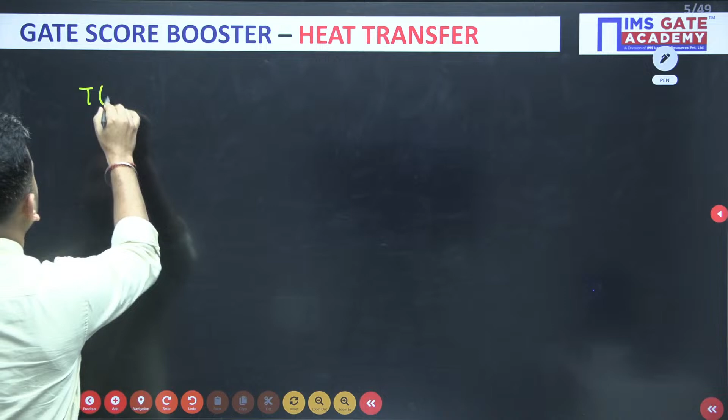The relation is given as TR equals G dot R naught square by K, times 1 minus R by R naught square, plus TS. Before going to the options, let us first find what requires some mathematical calculation.

Let me find the heat flux. Heat flux is given by minus K dt by dr. In the radial direction, the temperature is changing, so I am using dt by dr, and you can see it is varying with respect to r. So I will first find dt by dr and then substitute r equal to r naught.

So dt by dr, simply differentiate with respect to r. Ts is constant, so it will be 0. So r naught square by K, 1 differentiation is 0, minus 2r by r naught square, again Ts will be 0. Minus and minus is plus, so that is gone. Minus and minus is plus, and what are the terms which I can cancel? K and K get cancelled, R naught square gets cancelled, plus and plus is there.

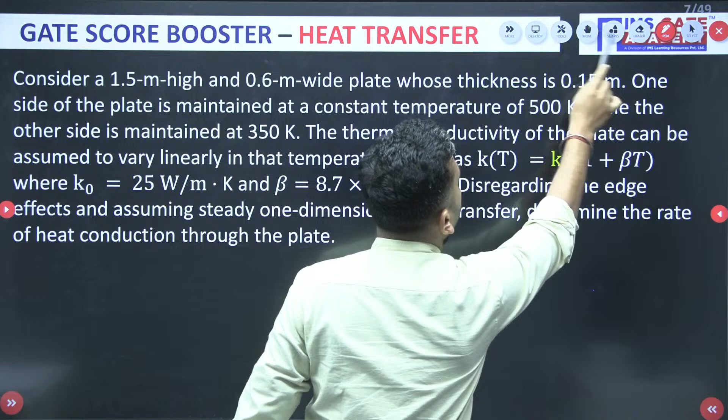Without wasting any time, let us proceed to the next question, and this is the next question that is there. Please read.

So this is an NAT question. You can give your answer close to 1 decimal place. The question is saying: consider a 1.5 meter high and 0.6 meter wide plate whose thickness is 0.15 meter. One side of the plate is maintained at a constant temperature of 500 Kelvin while the other side is maintained at 350 Kelvin. The thermal conductivity of the plate can be assumed to vary linearly in that temperature range as given: Kt equals K0 times 1 plus beta T, where K0 and beta values are given. Now disregarding edge effects and assuming steady state heat transfer, determine the rate of heat conduction through the plate. Yes, that is an NAT question.

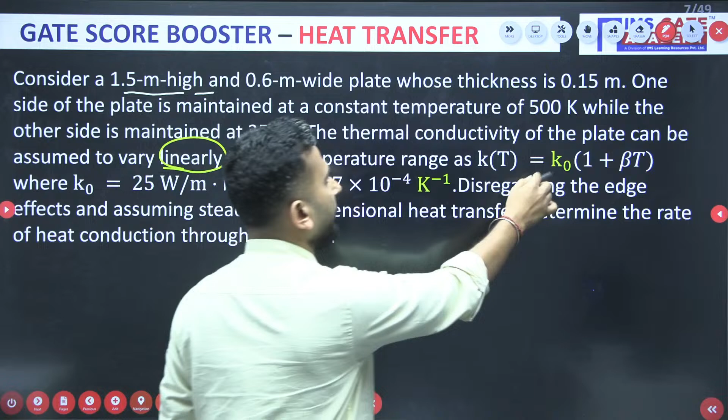The thermal conductivity of the plate can be assumed to vary linearly in the temperature range, given as K naught times 1 plus beta T, where K naught and beta values are given. Disregarding the edge effects, what is the rate of heat conduction through the plate?

So my dear friends, see, your K is varying. Your K is varying over here, with respect to temperature.

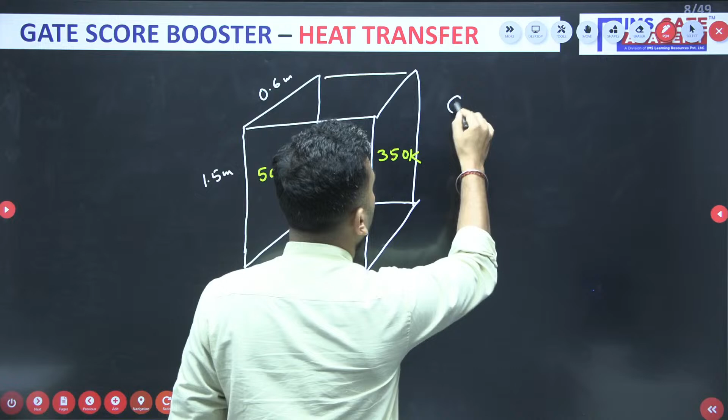So what to do? If you have read this concept of varying thermal conductivity, which formula do you use? That K average times A times del T by L, del T by thickness. The same formula for a slab I will use, but instead of K, which was constant in the formula, I'll be using K average. And what is K average? Your K average is the K value at an average temperature.

So K is given as K naught times 1 plus beta T. So what will be K average? K average will be K value at average temperature. That means K naught times 1 plus beta times T average. What is T average? T average will be 500 plus 350 divided by 2.

So K naught value is given as 25. Should I write it over here? K average is, okay, let me take it to the next page. K average is, K naught is 25, K naught times 1 plus beta. What is beta value? Beta value is given as 8.7 into 10 to the power minus 4.

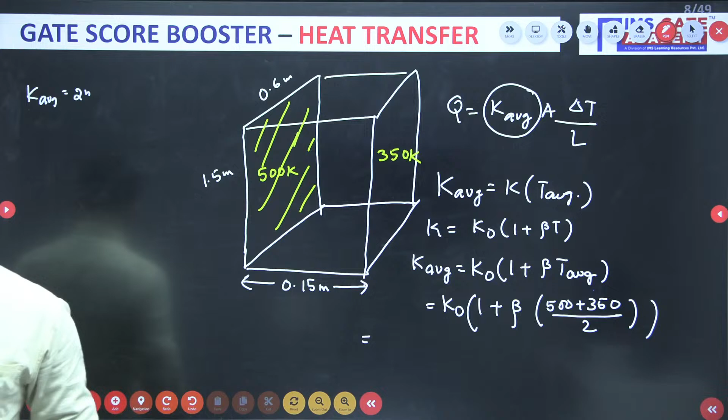You can proceed by integration also. If you don't want to proceed by the K average concept, you can proceed by integration, you will get the same answer. Anyway, moving ahead, I hope no doubt is there. Let us check the next question. I suggest everyone try the questions; if you are not getting the answer, immediately leave that question and proceed to the next. Now it's time to read another question.

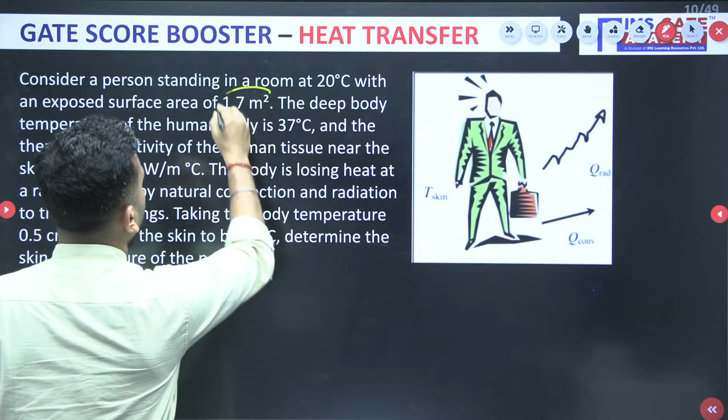So what is the question saying? Consider a person standing in a room at 20 degrees centigrade with an exposed surface area of 1.7 meter square. The deep body temperature of the human body is 37 degrees centigrade, and the thermal conductivity of the human tissue near the skin is given. The body is losing heat at the rate of 150 watts by natural convection and radiation to the surroundings, taking the body temperature 0.5 centimeter beneath the skin to be this value. Determine the skin temperature of that person.

Anyone with the answers?

Anyone? Okay, so I think it's time I should discuss.

From what he's saying, the body is losing heat at the rate of 150 watt by natural convection. Let's say, taking the body temperature 0.5 centimeter beneath the skin, this is the skin layer. 0.5 centimeter below the skin layer, the temperature is 37 degrees centigrade. That means I can assume it's a kind of hot, and from there the body loses heat.

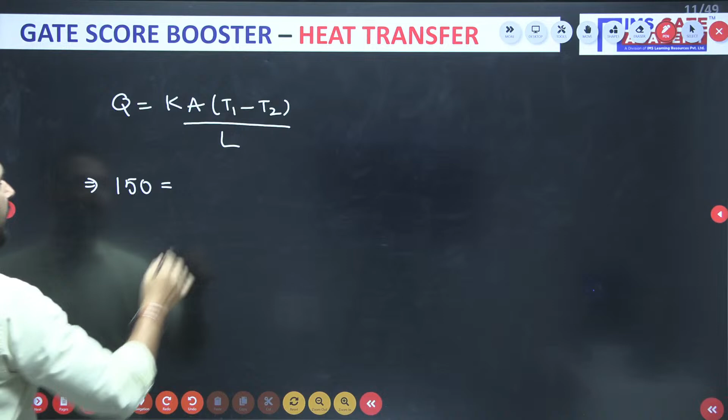I have to simply apply this formula and get one of the temperatures. So Q is equal to K A (T1 minus T2) divided by L. If you put over here, I know all the things: 150 is equal to K. K value is 0.3. And what is A? Area is given as 1.7.

1.7. And what is T1? T1 is 37. Minus, what is T2? T2 is T skin, divided by L. What is L? L is nothing but the thickness, so 0.5 centimeter, that means I can write 0.005 meter. And if you put all the things, the TS value will come out to be

35.5 degrees centigrade. So which makes A the correct answer. I got no answers for this, why?

Is it visible? Is the audio and all visibility clear? Is the audibility and visibility clear? Okay, so should I proceed? Should I proceed? Okay, because I cannot see your comments over here, so just a minute. Okay, no issues. So now the next question comes. This is the next question. Please.

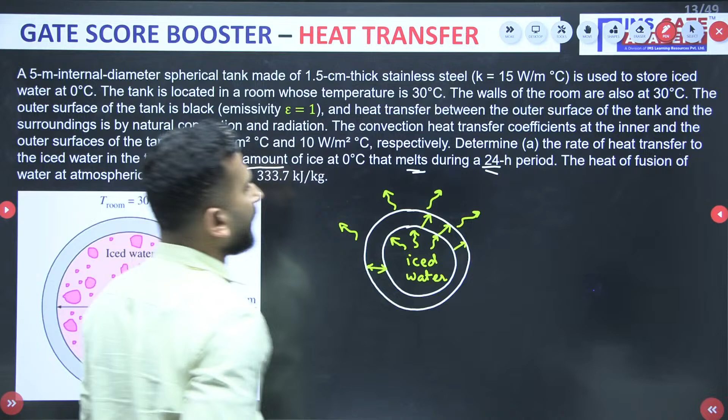When iced water is there, ice is kept. So when ice loses heat, it will definitely melt. That is the second part of the question, how much ice is melting during a 24-hour period. So first we have to calculate the rate of heat transfer, and second, how much ice is melting, because when heat is transferred, ice will melt.

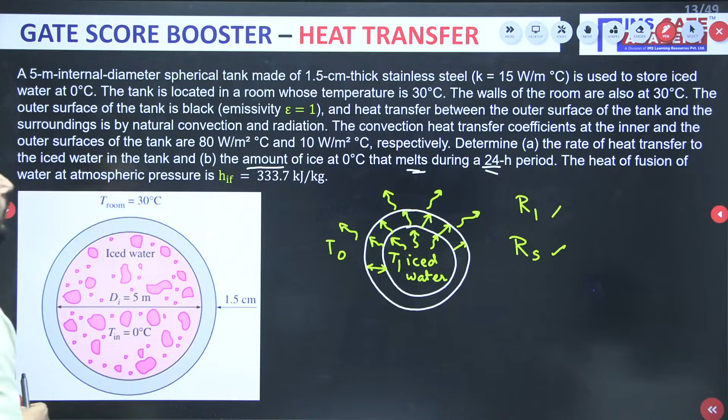So two parts there. First I will find the internal thermal resistance, R1 or Ri. Then I will find the resistance due to this spherical tank, let's say Rs, which is R2 minus R1 by 4 pi k R1 R2. Finally I will find the outer surface resistance. I know both temperatures, the inner and the outer. So basically I know all the things, I just have to calculate it using the given data.

So all the things I know.

Cannot see the comments, why? It's like that only, but I cannot see the comments. Chat is disconnected, Wi-Fi problem sir. So it cannot be refreshed. It's not connecting, for 10-15 minutes it is there. Reconnect. Yes, anyone with the answer? Anyone with the answer? You kept the mic on sir while speaking with me. It's okay, no problem, it's coming sir actually. I cannot see you, fine, okay.

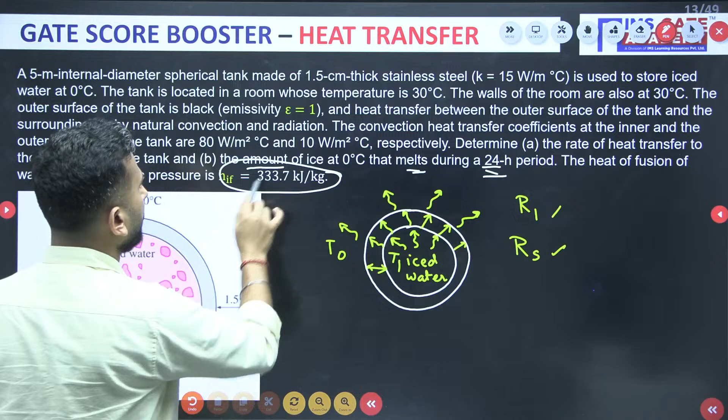Now the first part of the question is done, and the second part is how much ice melts. What is the amount of ice that melts during a 24-hour period? The heat of fusion is given, meaning for 1 kg, 333.7 kilojoules of heat is required.

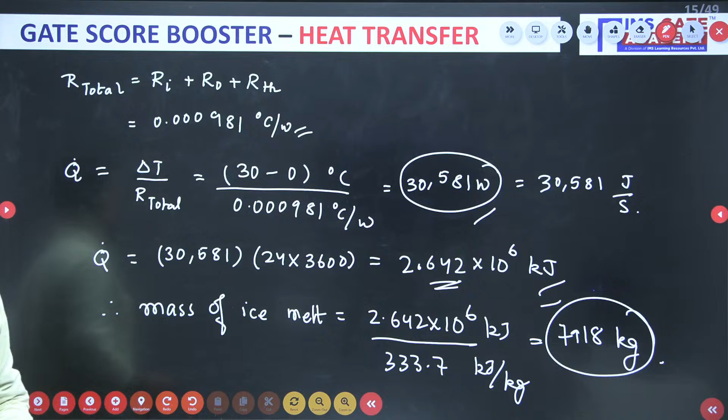No issues. So yes, Loki Christine, you are saying that I made a calculation error. Are you sure that you have not committed an error yourself? Are you sure that you have not committed a calculation error? Tell me, are you 100% sure?

So if that is correct, now let us move towards the next question. Okay, please read the question. Okay, let's move ahead.

This is the next question, my dear friends, and this is a question on fins. I am giving you 2 to 3 minutes to think about the question. Please try this question.

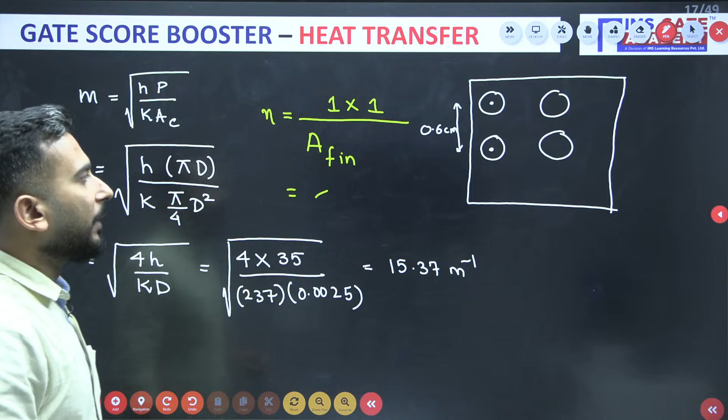But tell me one thing, is your fin occupying the entire flat plate? No, there is some distance between the fins. So you cannot apply this formula directly.

So what you have to find: let's say this is a section of 4 fins that I am taking, in a square of 0.6 by 0.6 centimeter. So in a square section of 0.6 into 0.6, how many effective fins are there? If you see this figure and have understood it, you will get to know that in a section of 0.6 by 0.6, there is a total of 1 fin that is lying.

So your total square section is 1 into 1, 0.6 centimeter by 0.6 centimeter square area, you have 1 fin. So now total how many fins will be there? Total number of fins will be 1 meter square by 0.006 into 0.006. That will give you the total number of fins. And if you solve this, you will be getting 27,777 fins. Is this clear? If this is clear, we can move to solve the next question.

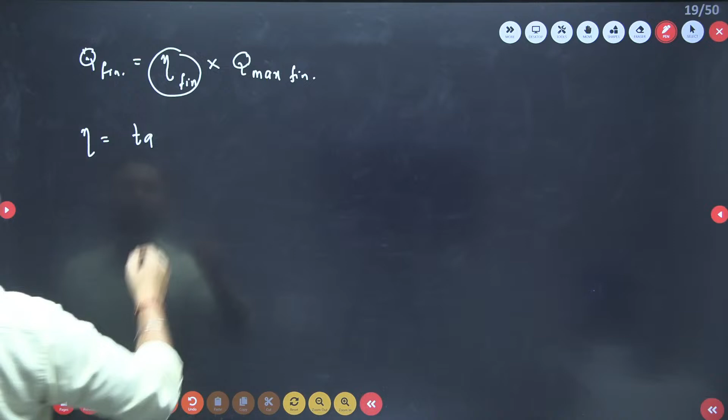What is m? As we calculated in the beginning, it was 15.37, and the length is 0.03 meter. So tan hyperbolic of 15.37 into 0.03, divided by 15.37 into 0.03. If you calculate this, the efficiency will come out to be 0.935. This is the efficiency.

Now what is the Q max? What is the concept of Q max? That when the entire fin is at the base temperature, then calculate what is the amount of heat transfer. So that is nothing but h into A, with the entire fin at base temperature, minus T infinity.

Okay, so should I write it directly? What is the Q from the fin? What is the heat transfer from the fin area? So efficiency is...

0.935. And what is the H value? H value is 35. And what is A? Now, area I am not taking for one fin. The total is 27,777 fins. That came out to be how much?

6.68. So 6.68 into what is TB? When I told you, the entire fin surface is assumed to be at base temperature. So 100 minus T infinite. T infinite is what? 30.

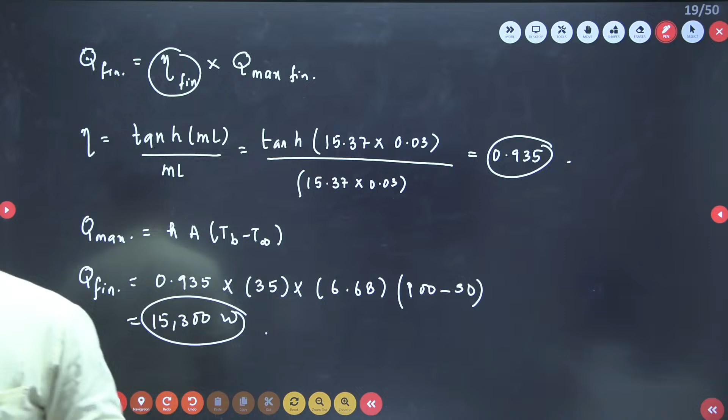T infinite is 30. Now what is Q fin? Q fin is 15,300 watts. 15,300 watts. Now this is Q fin. Is this your answer? My question is, is this your answer? Will this become your answer?

No one is replying anything. Will this become your answer? No. First I have to find what is the Q from unfinned. How will unfinned be calculated? What will be Q unfinned?

So H, area of unfinned, and which part? The part where fin is not there. Definitely it is at the base temperature. Yes or no? Okay, so what is H?

H is what? H is 35, given. Unfinned area we have found out. Unfinned area is 0.86. And what is the base temperature?

Base temperature is 100 minus 30. So if you solve this, it will be 2107 watts.

So now I can say, what is the total heat? Total heat is nothing but Q from fin plus Q from unfinned area. So what is Q of fin? Q of fin came out to be 15,300.

15,300 plus 2107 is equal to, what is the answer? You will get 17.4 kilowatt. 17.4 kilowatt.

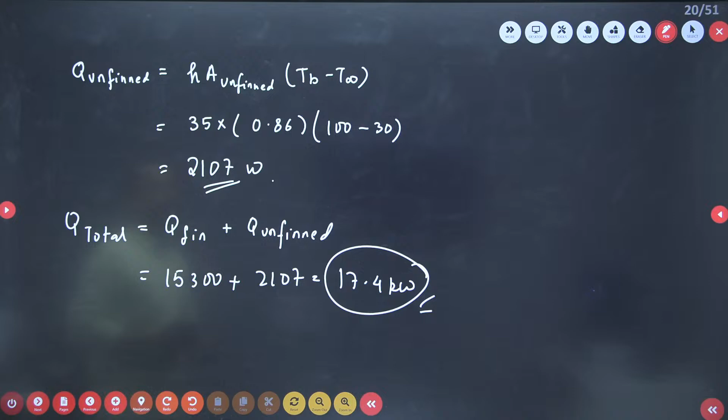So I told you that this is one of the best questions on fins that you will come across, and if this is clear, my dear friends, you will be able to tackle any fin question. Now the question is done, whatever he was asking. Determine the rate of heat transfer from... Determine the rate of heat transfer. The question is already done.

Now, what if he asks what is the effectiveness? I have not asked this, but this can be a very beautiful MSQ question. What if he asked you what is the effectiveness of the fin? So what would you have done? Q with fin divided by Q without fin. This is not the question, but what if we ask what is the effectiveness?

So effectiveness is Q with fin. You already know that is 17,400. After fin, what is the heat transfer? After fin, the heat transfer is 17,400. And when fin was not there, that means only the square plate was there.

So simply you will find HA delta T. What is HA delta T? HA delta T is nothing but 35, and area of the plate is 1 meter square, and delta T is 100 minus 30. So if you solve this, you would have got some...

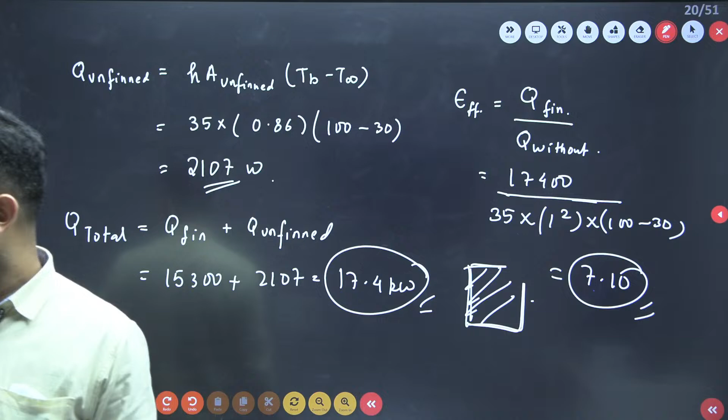2450. Anyway, the final answer would have been 7.10. 7.10 is the effectiveness. That means effectiveness is 7.10. This is not asked, but this could have been asked.

So my dear friends, I hope that this big fin question is clear to all. Is it clear, my dear friends? Is it clear to everyone?

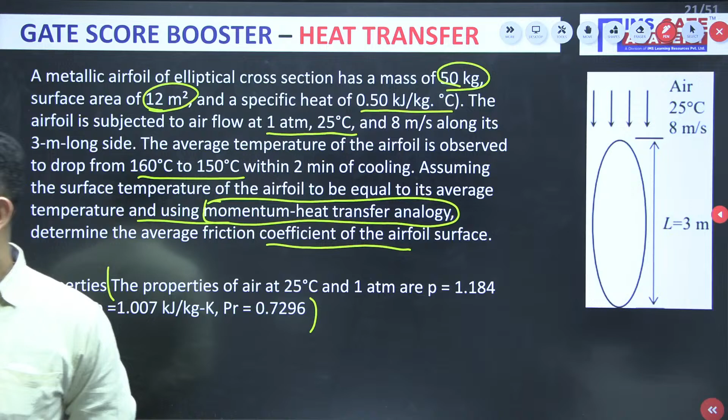My dear friends, let me tell you one thing. All these questions you find difficult, or they seem difficult, but apart from 2 to 3 questions, none of the solutions will be more than 5 to 6 lines. I tell you, none of the question solutions will be more than 5 to 6 lines. After reading, you will think it is a very difficult question — that is the beauty of the questions I have taken. Proper GATE level, tough 2 marks questions — based on that only I have taken all these questions.

So coming back, what is momentum heat transfer analogy? Cfx, the final result: Cfx by 2 equals Stanton number into Prandtl number to the power 2 by 3. If someone asks you what is the momentum heat transfer analogy, that is the Chilton-Colburn analogy — the connecting link between fluid mechanics and heat transfer.

What equation would you write? This is the equation. So he is asking what is Cfx on the left hand side. Prandtl number I already have — 0.7296. Very good. I only need to find the Stanton number.

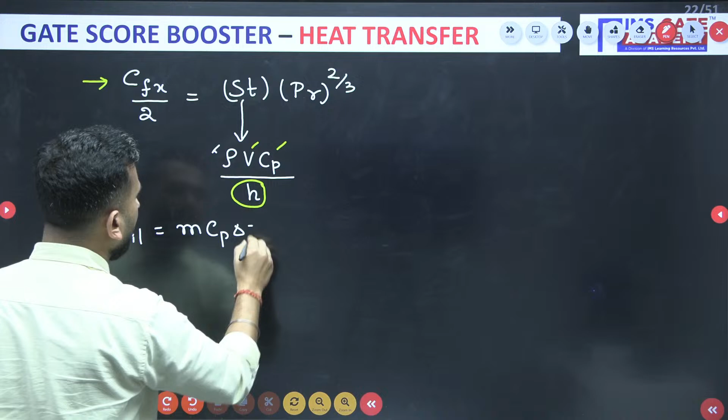So heat transfer from the airfoil: M Cp dT by time, joule per second. Putting in the data: mass is 50, Cp is 500, temperature drop is 160 minus 150, divided by time which is 2 minutes, so 2 into 60 seconds. If you calculate this, you get 2083 watt. I have already got Q airfoil.

Now, it is also equal to H A delta T, yes? And here H is lying. Very good. So Q equals H A delta T. I need to find the H value, so H equals Q by A into delta T. Q value already found: 2083.

Okay, what is the area? Has he given area? Wait, 12 meter square. It is 12 meter square. And what is del T? Del T is the heat transfer of the foil to the atmosphere. Atmosphere is already 25, but foil temperature, what will you take? Average temperature you need to take. What is the average temperature? 160 to 150, average is 155.

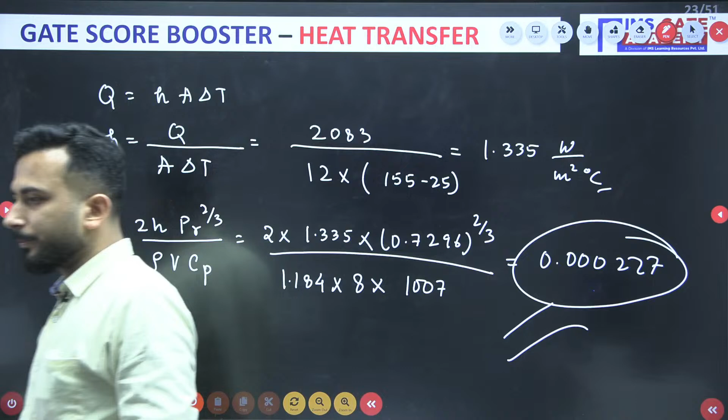Should we proceed? Ready for the next question? Okay, so we are not wasting even a single time. This is the next question for you, without wasting any time, we are not going to waste a single time.

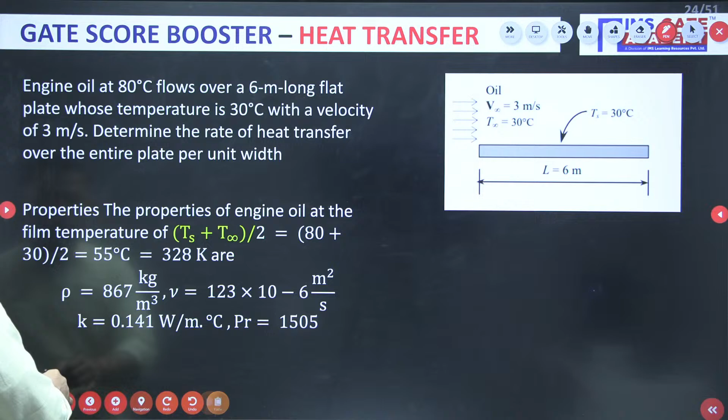My dear friends, what is the relation? I'll tell you the sequence. The sequence is very simple: first, I have to find the Reynolds number, to find whether it is laminar or turbulent. If it is laminar, I am going to use one relation; if turbulent, another relation. Let's say it is laminar: one relation gives Nusselt number from Reynolds and Prandtl number. Nusselt number I'll get, from Nusselt number I'll get H. Once you get H, you get the rate of heat transfer.

This is a very standard question in your entire convection chapter. The one thing you need to focus on is getting H. If I get the value of H, area I know, and temperature difference they will already give us, I will get the answer. In the last question also, I only needed H.

Stanton number, I only needed H. So in your entire convection, your only focus will be to get H. Once you get H, your job is done. Here also the same thing I am going to do. So what is the first step? The first step is I will be finding Reynolds number.

What is Reynolds number? Rho VL by mu. So mu by rho I can write as VL by nu because nu value is given. V is 3 meter per second, L is 6 meter, and nu value is 123 into 10 to the power minus 6. When you solve this, Reynolds number I will get as 1.46 into 10 to the power 5.

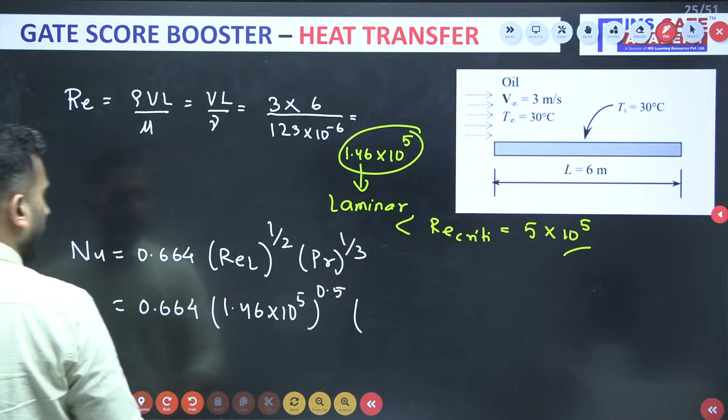What is the Reynolds number? 1.46 into 10 to the power 5 to the power 0.5. And what is the Prandtl number? Prandtl number they have already given, it is 1505, to the power 1 by 3. If you solve this, the Nusselt number you will be getting is 2908.

Okay, how to get H? Nusselt number is equal to HL by K. So H equal to Nusselt number into K by L. Nusselt number is 2908. What is the K value?

K value is 0.141. See here is the K value. And what is the L? L is 6. If you solve this, you will be getting 68.3, with all the standard units, watt per meter square degree centigrade.

If I know H, very easily Q value I will be getting as HA delta T. So H value is 68.3, and what is the area? Area is 6, into per unit width is saying, so 1 I have taken, and delta T is 80 minus 30, 80 is the environment, 30 is the surface. If you solve this, you will be getting 20.5 kilowatt as the answer.

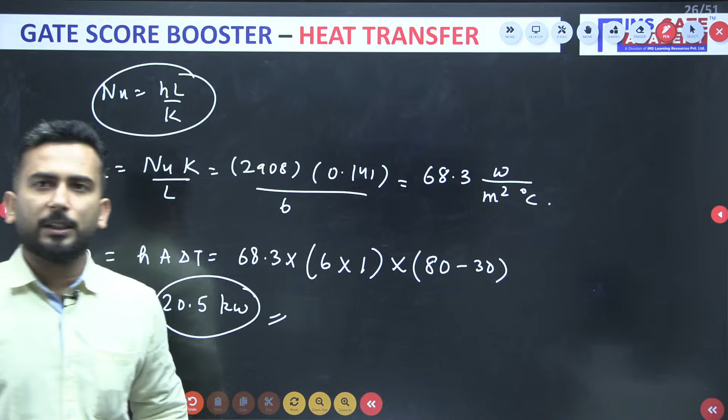No, GATE aspirant, all the answers you are getting wrong only. No Shreya, your answer is incorrect. Why it is not matching? Or have I calculated any calculation error? Have I done any calculation error? No, it is possible, I can also do calculation error. That is not the big deal.

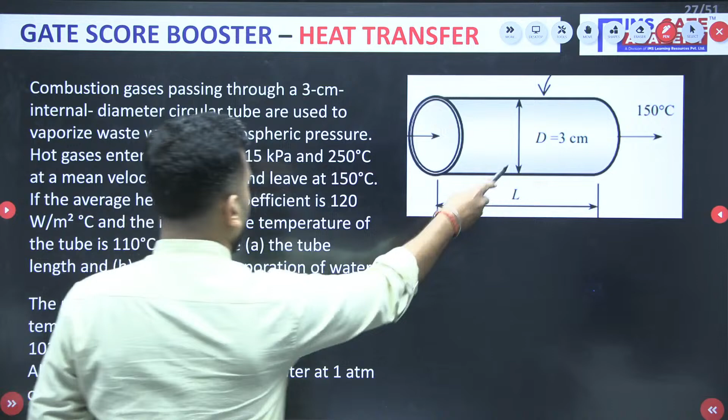Combustion gases passing through a 3 centimeter internal diameter circular tube are used to vaporize wastewater at atmospheric pressure. Hot gases enter the tube at 115 kilopascal and 250 degrees centigrade at a mean velocity of 5 meters per second, and leave at 150 degrees centigrade. If the average heat transfer coefficient is 120 watts per meter square per degree centigrade, and the inner surface temperature of the tube is 110 degrees centigrade, determine the tube length.

And second, B, the rate of evaporation of water. So it is one of the best questions that you will come across.

Now, my dear friends, see one thing. Wastewater is at one temperature, that is 110 degrees centigrade. Try to understand that when combustion gases are flowing, at the entry they are at a temperature of 250 degrees centigrade, and when they are exiting, it is at 150 degrees centigrade.

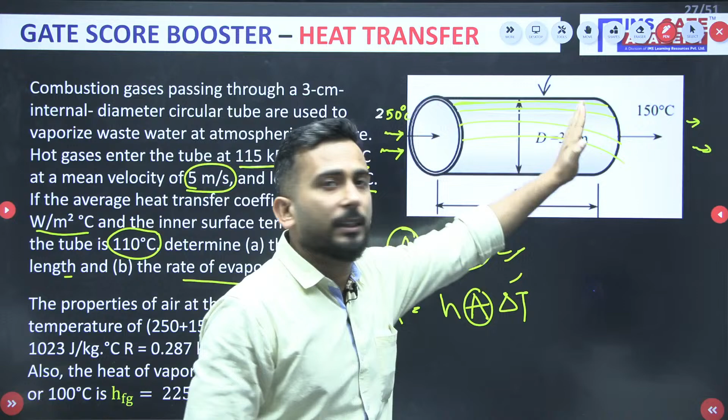Now delta T. See, my dear friends, as the hot gases are moving from one end to other end, in the tube wastewater is there and it is at a constant temperature. That means at every instance the temperature difference is changing, and whenever it happens, that means it is a heat exchanger, where at every length, the temperature difference is changing. And if we have to take one single delta T, that means I need to use the concept of LMTD, logarithmic mean temperature difference.

So my dear friends, how to get LMTD? You will say, sir, for LMTD we need 4 temperatures, but my dear friends, 2 temperatures I already know, and the third one, the water is constant at 110. That means it's a case of evaporation condensation, and you know that whether it is counter flow or parallel flow, we have the same formula. Yes or no? So LMTD we will be able to get, no issues with that. Very good.

But again, how to calculate Q? That is another thing. Delta T, matlab I can write, sir, this is nothing but LMTD. It's a heat exchanger, so LMTD se mil jayega, no issues. But how to calculate Q?

Again, my dear friends, you need to see how, any information about the hot gases that he has given? Any information about the hot gases that he has given?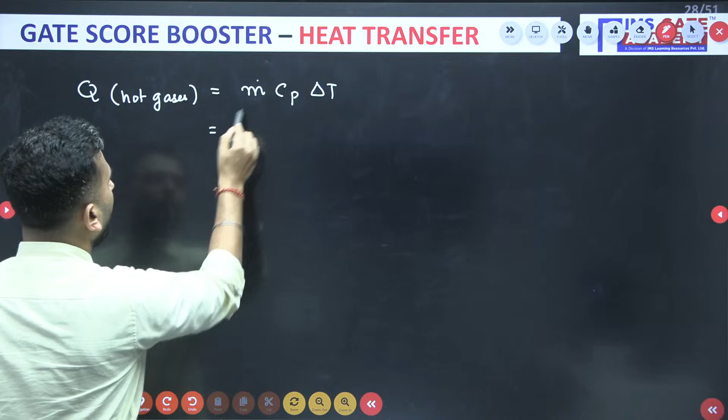So M, Cp value do I know? Cp value 1023. Okay, 1023. So Cp value I know, 1023. Delta T do I know? 250 minus 150.

But do I know mass? No, I don't know mass. Then how to calculate mass? Now he has given some extra information for mass: rho into Q, rho into area into velocity. So what is rho? Density has he given?

Density he has not given. Area do I know? Pi by 4 d square. Area I can find: pi by 4 into d square. See the beauty of the question.

And velocity, has he given? I think he has given the velocity, 5 meter per second. But I don't know what is rho.

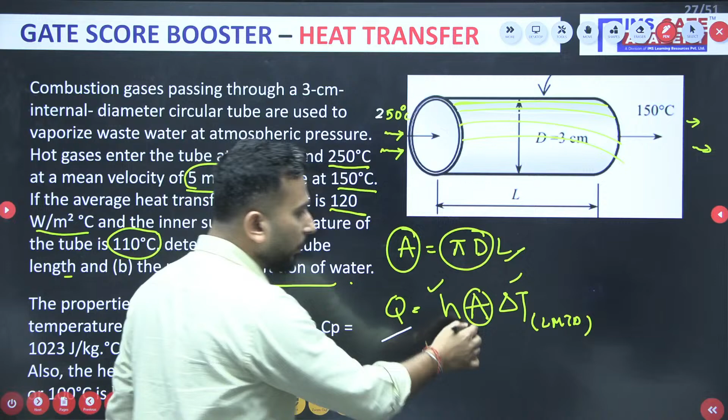Now go back. I know Q, I know area, I need to find delta T. Oh my God, what a question this is. Okay.

So delta T is equal to, assuming counter flow or parallel flow, you will get the same answer: inlet, exit by exit. So one is 250, it is cooling down to 150, and it is 110, and it is 110, the tube temperature. Okay, no issues.

So delta Ti is 250 minus 110, that's 140, and delta Ta is 150 minus 110, so it is 40 and 140. So what is delta T? LMTD is delta Ti, 140 minus 40, divided by ln of 140 by 40. When you solve this, you get 79.82 degrees centigrade.

LMTD we have got. I will put it over here. H I know, 120. Q I know, so I'll get area. Very good, now we can see the end of the question. So Q is equal to H A delta T of LMTD.

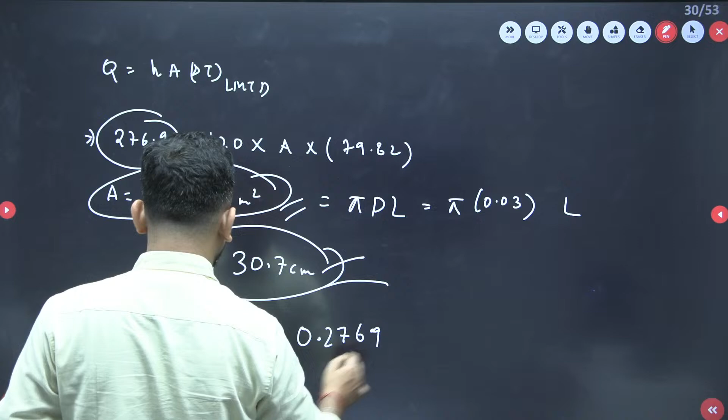276.9. Okay, we know the total heat transfer, no issues. So Q dot is equal to mass into HFG, that is the latent heat of vaporization. So I think he's asking kg per second. So Q dot, I know, it is in terms of kilowatt, it will be 0.2769, in terms of kilowatt, is equal to m dot. And what is HFG? HFG he has given as 2257 kilojoule per kg. So when you calculate m dot, it will be 0.2769 divided by 2257. Whatever answer you will get, it will be in kg per second.

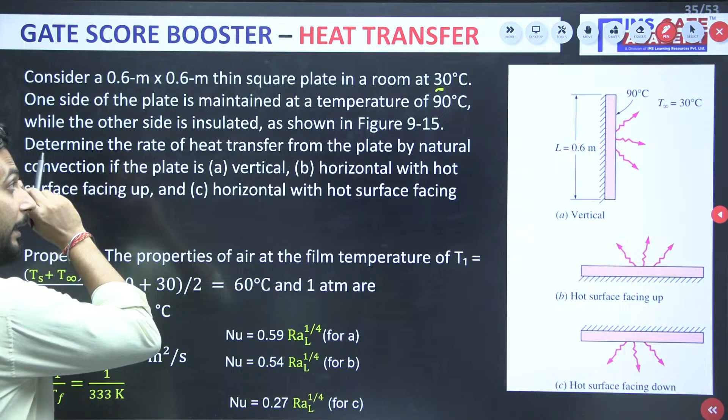So what is the question? Consider a 0.6 meter by 0.6 meter thin square plate in a room at 30 degrees centigrade. One side of the plate is maintained at a temperature of 90 degrees centigrade, while the other side is insulated as shown in the figure. Determine the rate of heat transfer from the plate by natural convection when: A, it is vertical; B, it is horizontal with hot surface facing up; and C, when it is horizontal with hot surface facing down. My dear friends, you will get to know many things in this question.

The only thing you should note is that here the product of Reynolds number and Prandtl number will not come into picture. Here the product of Grashof's number and Prandtl number will come into picture. Grashof into Prandtl is known as Rayleigh number. So what I have done is directly give the Nusselt number and Rayleigh number relation to you. You know that you have to calculate Rayleigh number and then use the Nusselt number relationship, from which you will get the H value.

Once you get the H value, you will calculate the rate of heat transfer. That is the sequence. Whenever we need to calculate the amount of heat transfer, ultimately area we know, delta T also we know. It comes down to determining the value of H. Once you get the value of H, you will very easily solve the question. But you need the H value, and for that you have so many relations. I can say 60% of the chapter tells you how to finally get the H value. That's why so many relationships are there. Once I get the H value, I'll be getting to know the heat transfer.

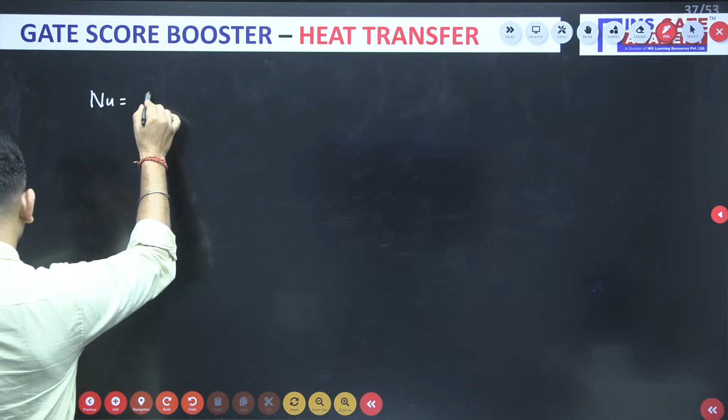0.59 into Rayleigh number to the power 1 by 4. So 0.59 into, what is the Rayleigh number? Rayleigh number is 7.656 into 10 to the power 8.

If you solve this, you will be getting close to 98.14. Okay, this is the Nusselt number. Now you know the sequence.

I need to find H, H LC by K. So Nu into K by L. Nu is first of all 98.14, and what is K? K value they have given is 0.02808. And what is L? It is 0.6 meter. So then you will be calculating the H value.

So once you get the H value, what is area? AS is L square, flat plate hai, L square 0.6 square. You know H, what is Q? Q is H AS delta T.

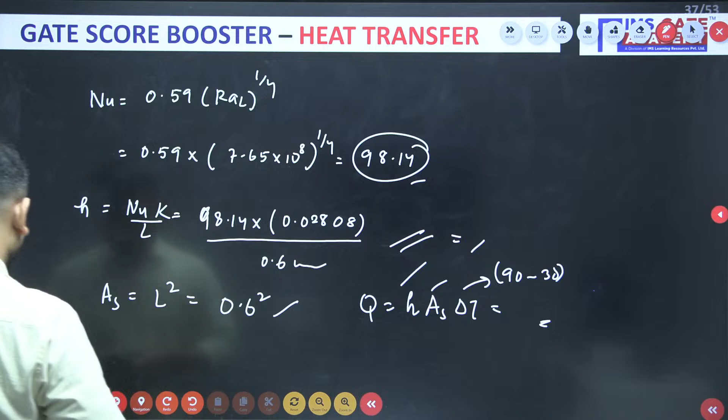Is it clear? Is it clear?

My dear friends, what is the difference between the first part and the second part? All the method is same. What is the difference then? What is the difference between the first part and the second part?

What is the difference? See, one part I have already done. Now second and third you have to do. But how? In the second part, my dear friends, how will the second part vary? In the B part, everything that we have done, everything remains the same, but where it actually varies is in the characteristic length.

So what is L? L is 0.6 meter, and 0.6 meter by 4, so you will get the characteristic length, and rest all the things are same. Everything remains the same.

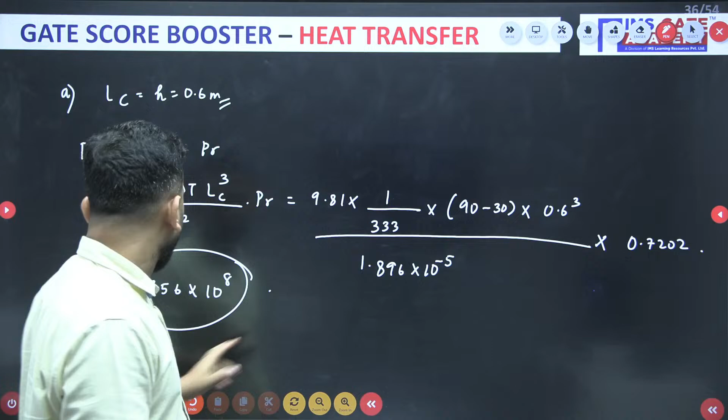Once I know the characteristic length, I'll find the Rayleigh number: G beta delta T LC cube by nu square. Rayleigh number aa gaya. From Rayleigh number to Nusselt number relationship, they have already given this. This is the Nusselt number relationship. From there H will come, and then using H, A, delta T, the area will be the same, and delta T will be the same.

One thing are you observing? In the first case it is a 0.59 factor, in the second case it is 0.54, and in the third case it is 0.27. Why a sudden drop in the third case? I can clearly see if Nusselt number is more, H will be more, so heat transfer will be more. So definitely I can sense that the heat transfer I will be getting from the last case is slightly lower than the first two cases.

Can anyone guess why it is so? It is because in the third case the hotter surface plate is kept in the downward direction, facing the floor. So most of the heat is trapped due to the enclosure. Where will it go? If it is trapped, will there be sufficient heat transfer? Definitely not. That is why most of the heat will be trapped and the heat transfer you get is low. That's why you can see the reduction in the third case.

So my dear friends, I expect everyone to solve these two and tell me the answer in the comment section. Not now, after the session is over, right? After the session is over. So is it clear? Is it clear?

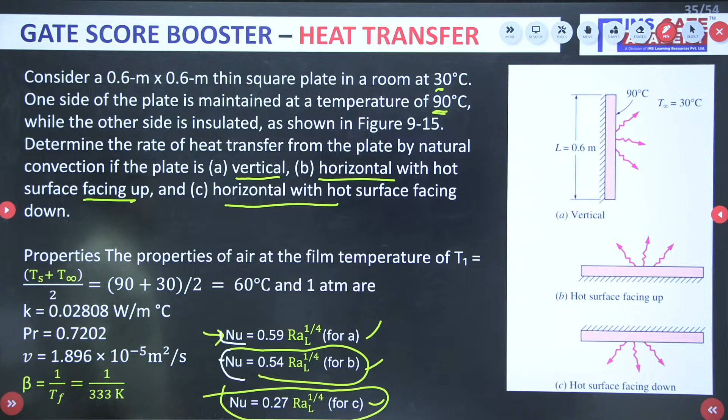So if this is done, let us move towards the next question, my dear friends. Let us move towards the next question, my dear friends. Please, one of the other beautiful questions, one of the other best questions on convection. Please.

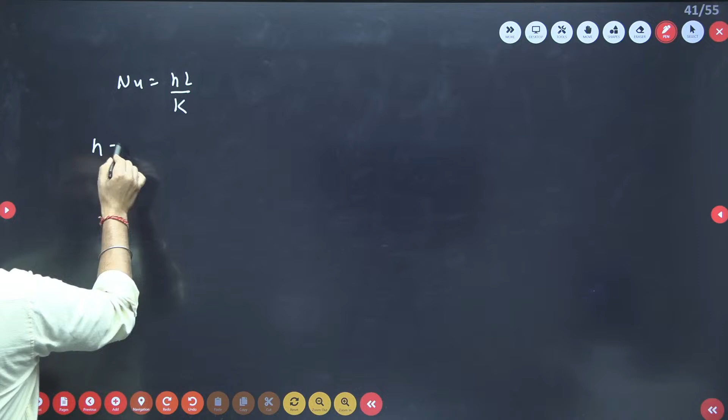H value is what I basically need to calculate. HLC, LC is nothing but diameter. K value is this. Nusselt number is 17.40, and LC is 0.08 meter, that is the diameter. So what is the H value that we are getting?

So this is the H value. And now what is he asking? Rate of heat transfer, okay.

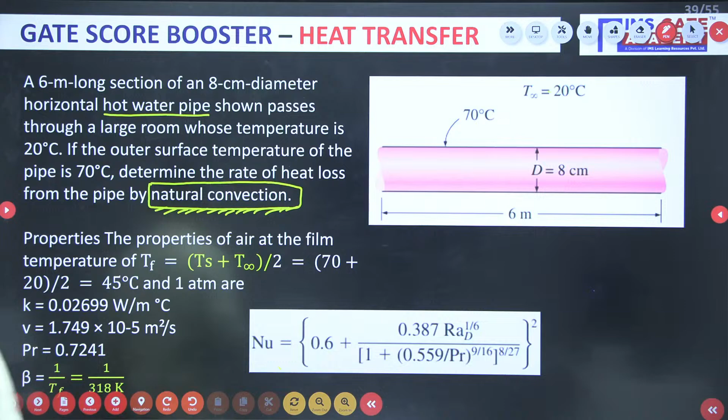So how to get the area? Area of heat transfer is not given. From what area is the heat transfer taking place? The heat transfer is taking place from the outer surface area. So what is the total outer surface area? Pi d into L, that is the outer curved surface area.

So pi, and d is 0.08, and what is L? L is 6 meter. So if you calculate the heat transfer area, it will come out to be 1.508 meter square.

So area you know, H you know. So what is heat transfer? H A S delta T, very good. Only one relation is there. What is H?

5.869. What is AS? 1.50. And what is delta T? Delta T is 70 minus 20. So if you add all those things, you will get your heat transfer to be 443 watt.

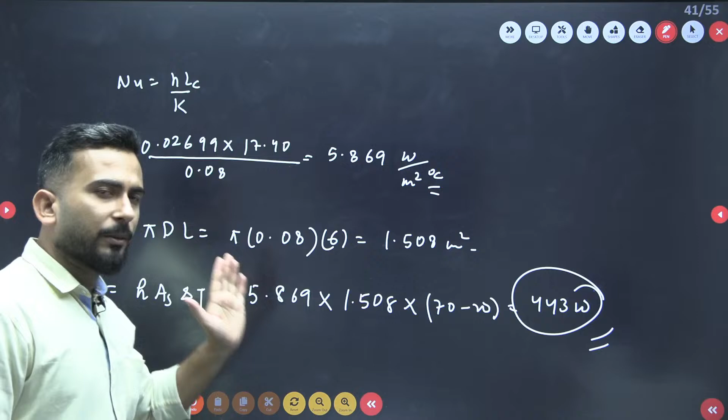My dear friends, these questions seem very lengthy, but if you do such questions, trust me, in the examinations you are going to be very comfortable. This big or tricky a question may or may not come, that is not the issue. But you need to be confident to face any question in the examination. For that only we are doing such sessions, purposefully putting difficult questions. It will also tell you how good your preparation is. I think we have done sufficient questions from convection, and I'm sure whatever question comes from convection, you will be in a very good position.

Now I think we should move towards radiation. Conduction we have already done. Heat exchanger, not many, but I think one question we have done. Convection we have done many questions, covering all the types and variety - external forced convection, internal, and free convection also we have covered. So I think we are left with only one big major chapter, and that is radiation. Once radiation is done, I can say I have covered almost all the chapters in heat transfer.

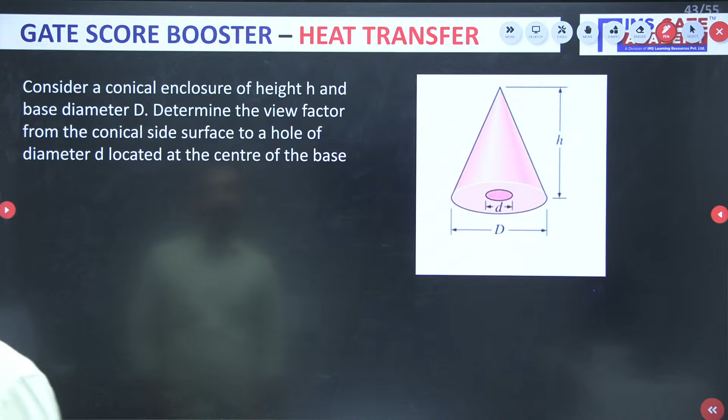So the question is saying: consider a conical enclosure of height h and base diameter D. Determine the view factor from the conical side surface to a hole of diameter d located at the center of the base. In the center, one hole is made of diameter d, and he is asking what is the view factor.

So something like this is the figure and numbering. So what is he asking? He is asking F31 or F13.

My dear friends, only focus: one is the hole of diameter d, and what is 3? The conical surface, the conical internal surface.

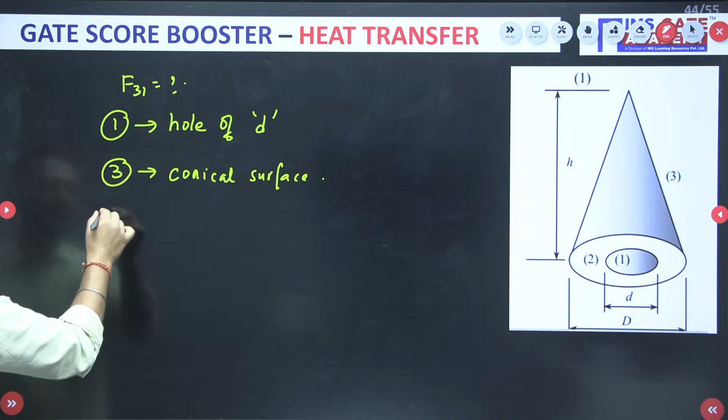Can I directly apply the reciprocity theorem relationship? Yes. A1 is the hole area, so pi by 4 into d square. What is F13? It's a flat surface, so it will be 1 only.

Now, F31 I need to find out. But what is A3? What is the curved surface area of the cone? Pi R L, where R is diameter by 2, and L is the slant height.

What is L, the slant height? Root over h square plus, something like this, D by 2 square, so D square by 4. This is the slant height.

So pi by 4 d square is equal to pi r l, root of h square plus D square by 4, into pi r l into F31. My dear friends, I think from here we can simplify.

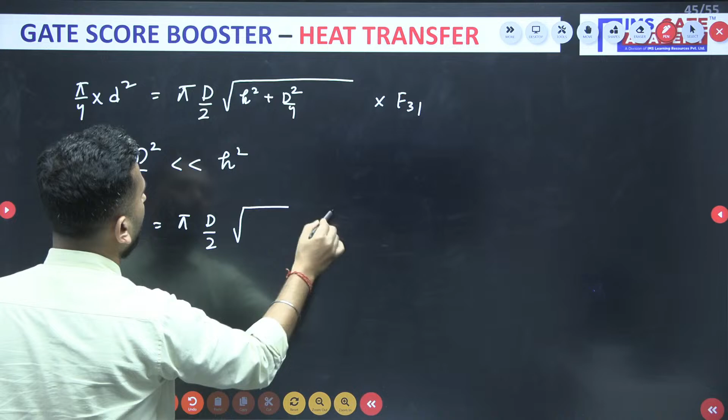See, this D square by 4 term, he has assumed is very, very less than h square. So it is very less, better to write h square only.

So F31: pi by 4 d square is equal to pi d by 2 root h square into h into F31. Pi and pi gets cancelled. It is 2. So what we are left with? d square by 2Dh.

Yes, something like this. Suppose he has given this as the answer with no root sign. So how could he possibly have simplified? That I have shown, so very easy.

You can definitely expect one question from the view factor. Last year also there was one question, this is also, so that's why we have covered view factor also. I think it was not a very tough question, it was a relatively easier question. Without wasting any time, let us move towards the next question, my dear friends. We are not wasting a single minute, question after good question - it is up to you how much you can absorb.

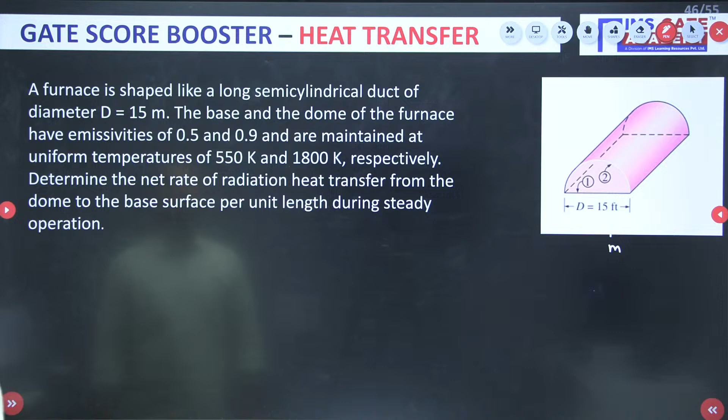So what is the question saying? A furnace is shaped like a long semi-cylindrical duct of diameter 15 meter. The base and dome of the furnace have emissivities: base having emissivity of 0.5 and dome having emissivity of 0.9, and are maintained at uniform temperature. Determine the net rate of radiation heat transfer from the dome to the base surface per unit length during steady operation.

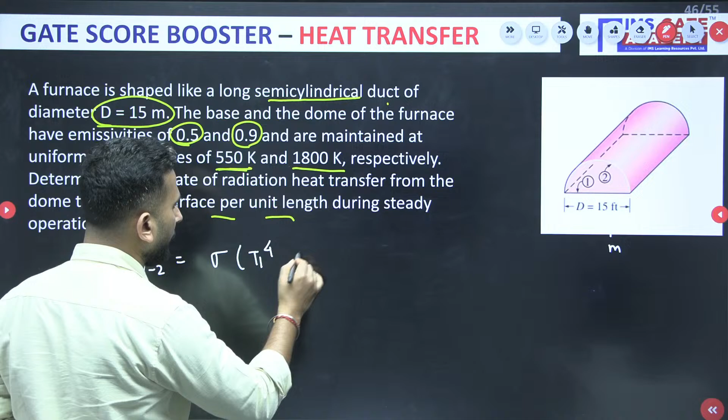My dear friends, see, it is a two surface enclosure. If it is a two surface enclosure, you know the formula: sigma times T1^4 minus T2^4, divided by (1 minus epsilon1) by A1 epsilon1, plus 1 by A1 F12, plus (1 minus epsilon2) by A2 epsilon2.

Now it does not matter which one you have taken as 1 or which one you have taken as 2. It does not matter. The answer or the magnitude you will get will be same. Obviously there will be a plus and minus difference. That is very much obvious.

But one thing is there, my dear friends, it is a very important point as far as your examination is concerned. Let's say this is the base, and this is the dome.

If you have taken your dome as 1 and base as 2, definitely when you have written A1 F12, and if you try to find F12, then you need to find the view factor separately.

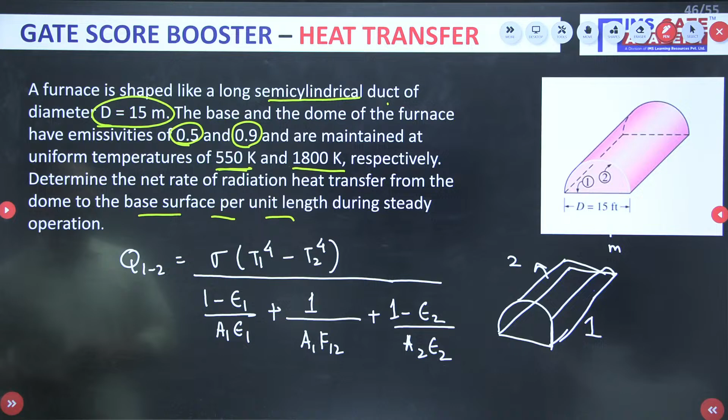Even if I need to find the area of semicylinder, that is not a very big task that I anyway have to find. That is not the thing. But I hope you got the point. Okay.

So simply I will be putting or substituting everywhere. So what is sigma? 5.67. I have not calculated this entirely. I will be simply putting the values and leave it for you to calculate. What is T1? T1 is, let's say, 550.

Now don't get confused by R over here. It is just that I have given Kelvin in the question. So consider Kelvin. T1 to the power 4 minus 1800 to the power 4, sigma T1 to the power 4 minus T2 to the power 4 by 1 minus epsilon 1.

That is 0.5. 1 I have considered to be the base. 0.5. Area was 15 per unit length, per unit length. So 15 into 1, plus 1 by A1.

15, F12 I told it is 1, plus 1 minus epsilon 2. It is 0.9 by what is area? Pi R L, area pi d by 2, pi into d by 2 into distance length L into epsilon 0.9.

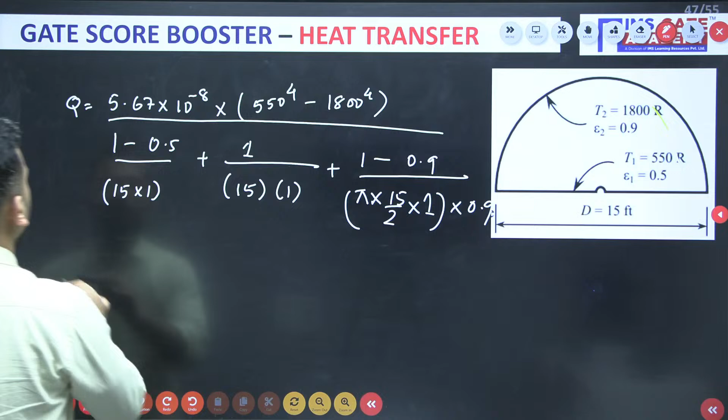Now I am leaving the calculation up to you. This you have to calculate, and my dear friends, I can tell with certainty that you are going to get a negative answer. So no need to panic.

The heat transfer rate is same magnitude wise. So just because it is from the one that I have considered, it is from 1 to 2, that is from base to dome. But when you calculate from dome to base, definitely you will put a minus sign and then you will get the answer as positive.

So I am not calculating the entire thing because my main agenda is not to show you how the calculation is done. Calculation, I am sure that you are better at it, and my only job here is to tell you the concepts related to it. So I am expecting that you will be solving this and letting me know the answer in the comment section. Meanwhile, just check this once, and we will be proceeding towards the next question.

So here is, my dear friends, one question from radiation shields. I'll tell you, view factor we have done. From radiation, view factor question we have done. Heat transfer radiation networks question also we have done. Yes, the last question was from radiation networks only, where space resistance, surface resistance, all will be there. That also we have done. But radiation shields is another important topic which can come in the examination, and this is the question from radiation shields. So please read the question.

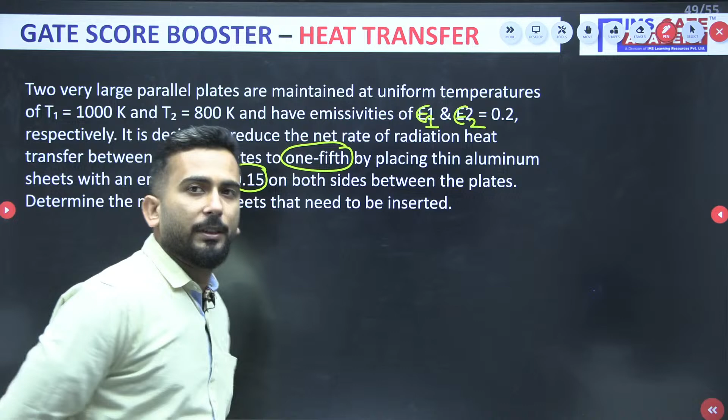Another very brilliant question of radiation shields, my dear friends. I request my dear friends to read the question again before I start solving.

So he is saying that when you place some N shields, that Q should be 1/5 of the Q when no shields are there. This is the most important information that we can extract.

Can we find Q with no shields? Yes, definitely, why not. Do we know the formula?

Yes, we know. Flux, if I ask, it is sigma T1 to the power 4 minus T2 to the power 4, divided by 1 by epsilon 1 plus 1 by epsilon 2 minus 1. So this we have already studied many times. There's the figure that you can see over here.

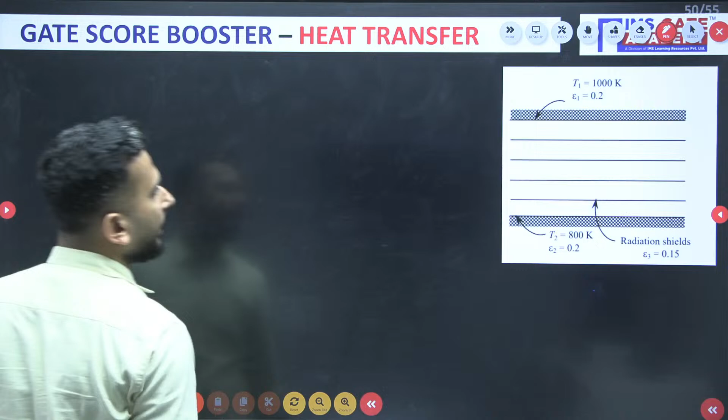So let's say what is Q with no shields. Q with no shields is nothing but sigma, 5.67 into 10 to the power minus 8. What is T1? Let's say I'm considering the higher one, to the power 4, minus 800 to the power 4.

1 by epsilon 1, what is epsilon 1? Both are same in this case, that is not the issue. 1 by epsilon 2, that is also same, minus 1. Okay, anyone can give the answer?

So if you solve it, you will be getting 3720 watt per meter square. Why? Because I have calculated the flux, that means for a unit square area, 1 meter square area, we are finding.

Now, my dear friends, before I write the formula, see, suppose this is the first plate and this is the second plate. These are the two plates, and initially no shields are kept. Now imagine that I have inserted one shield to reduce the rate of heat transfer, which is the purpose of the shield. Now what changes do you see in the formula?

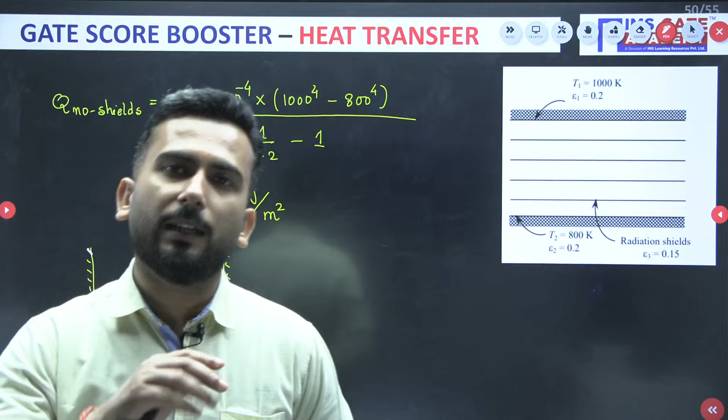Definitely 2 extra surface resistances and 1 extra space resistance gets generated. This is how we learn this concept, due to placing this shield.

And what is that then? Let's say, Q with 1 shield. So again, sigma T1^4 minus T2^4, divided by 1 by epsilon 1 plus 1 by epsilon 2 minus 1. How do we know? Now wait, now see.

For one extra shield, see, 1 by epsilon 3 to 1 plus 1 by epsilon 3 to 2 minus 1. Now this is for one shield. If you insert 2 shields, you would multiply this by 2. If you insert 3 shields, you will multiply by 3. And if you insert n shields, you will multiply by n.

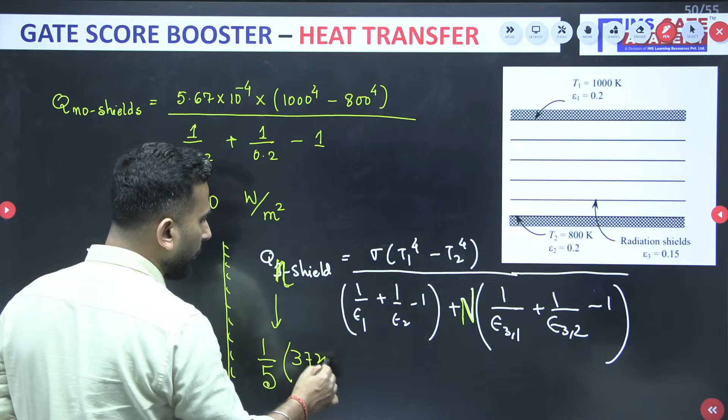This is how we have to remember. And that is what he is asking, what is the value of n. Now Q with n shields, here I am writing n shields. So do I know this? Yes, I know that this is 1/5 of 3720. Let me take this to the next page.

So once again I am writing the formula. Q with n shields, this is how we have to memorize the formula, the concepts. Simply memorizing will not have a very good outcome. So Q with n shields is sigma T1^4 minus T2^4 divided by 1 by epsilon 1 plus 1 by epsilon 2 minus 1, plus n shields and 1 by epsilon 31 plus 1 by epsilon 32 minus 1.

We already know that this is 1 by 5 of 3720, and sigma, now all the things you have to substitute: 5.67 into 10 to the power minus 8, and what is T1? All the things are same, only 1000 and 800. This is 1000 to the power 4 minus 800 to the power 4, divided by, what is epsilon?

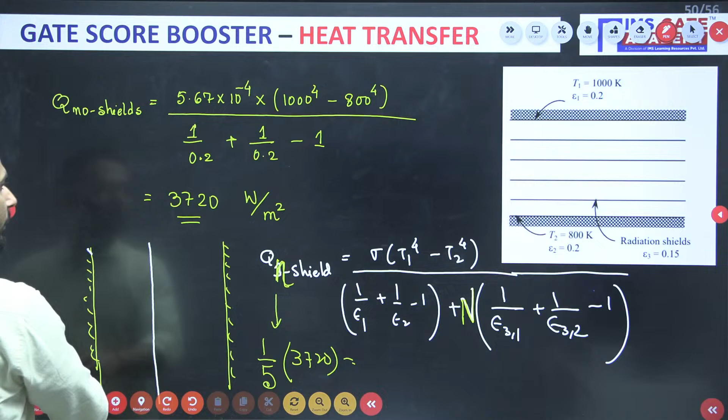Epsilon, I think, is 0.2. 0.2 minus 1, plus n, I don't know, times that value, epsilon 31, epsilon of the shield is given as 0.15, plus 1 by 0.15 minus 1. And my dear friends, when you solve it, please let me know what is the answer. Please solve.

So my dear friends, when you solve it, you will be getting your n value as 2.92, which is equivalent to 3. So my dear friends, this is the number of shields which you need to list, right?

Just see, I told you this question is done first of all. We have got the answer 3. And now my dear friends, whatever questions I have taken today have covered almost everything. I'm not saying 100% of the topics have been covered, but more than 90% of the important topics that will come in examination have been covered, without wasting any single time.

I have taken the question, given you 2 minutes of time to solve, and I have solved it over here. Yes, some calculations I have left for you, but I expect you to solve them and let me know in the comment section how to proceed. Some 12 to 14 questions that I promised in the beginning, good questions, one of the best questions of HT I have covered over here, right?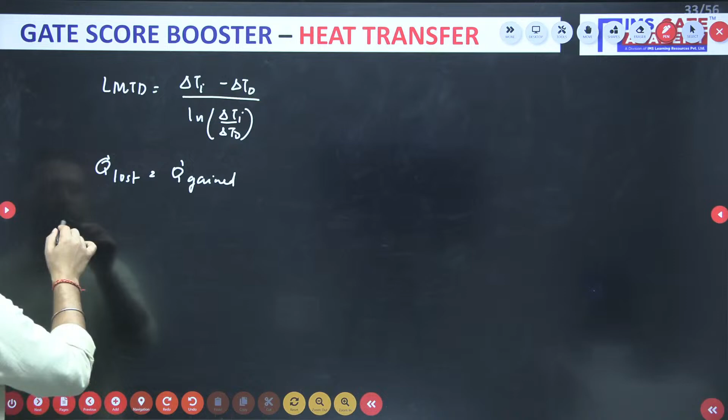So, heat lost equal to heat gain. Heat lost equal to heat gain. So cold water is being heated, so geothermal will be losing. No issues, geothermal will be losing. Okay, so m dot. So do we know all the data?

So right hand side we know, gain we know, so no issues. m dot Cp, T in minus T out for the geothermal water is equal to m dot for cold water, Cp of the cold, and how much it is exit of cold minus inlet of cold.

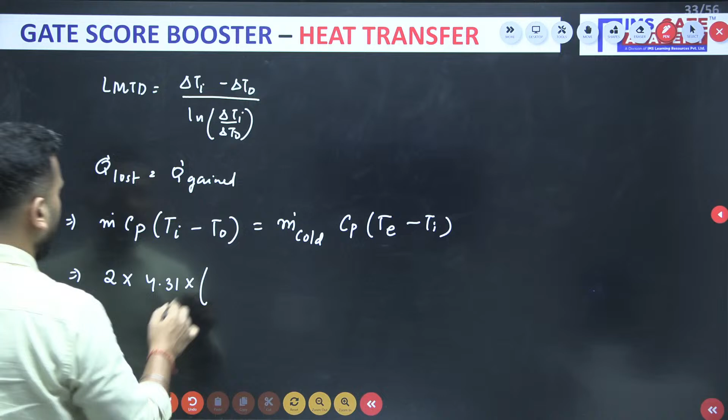So we know this 1.2. Geothermal mass flow rate is 2 kg per second. What is the CP? 4.31. What is Ti? 160. T naught I don't know, T exit I don't know. M dot cold is 1.2, CP is 4.18. From where to where? 20 to 80, so 80 minus 20. This will come out to be 301 kilowatt.

And finally, when you find T naught of geothermal, it will come out to be 125 degrees centigrade. So the fourth temperature we have calculated.

So from here it is how much? 20 to 80, okay. So this is 20, cold water, this is 80, and it is counter flow. So this is 160, and this is 125. So what is delta Ti? Delta Ti you can easily find out, 125 minus 20, taking positive. So what is this? 105. Delta T out, if I take positive, 160 minus 80, so it will come out to be 80 only.

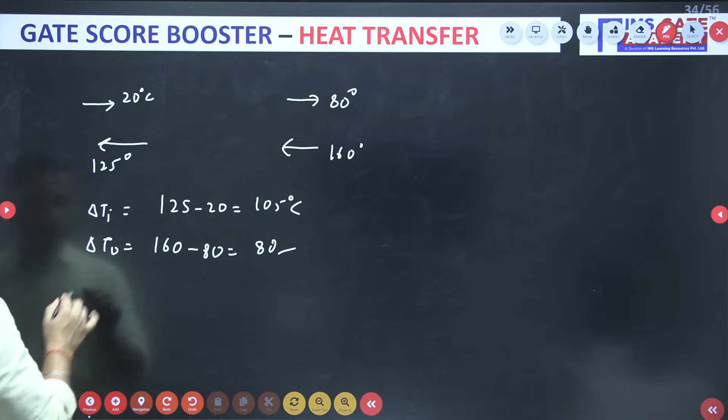So can we calculate delta Tm? What is delta Ti? 105 minus 80, delta Ti minus 80 by ln of 105 by 80. So what is LMTD? LMTD will come out to be 92 degrees centigrade. LMTD is done.

So you know Q is equal to UA delta T. Q we already know, actual heat transfer, how much? 301. What is overall heat transfer coefficient? Overall heat transfer coefficient is given as 640. Wait, 301 is in kilowatt, so we have to write 301 into 10 to the power 3 watt.

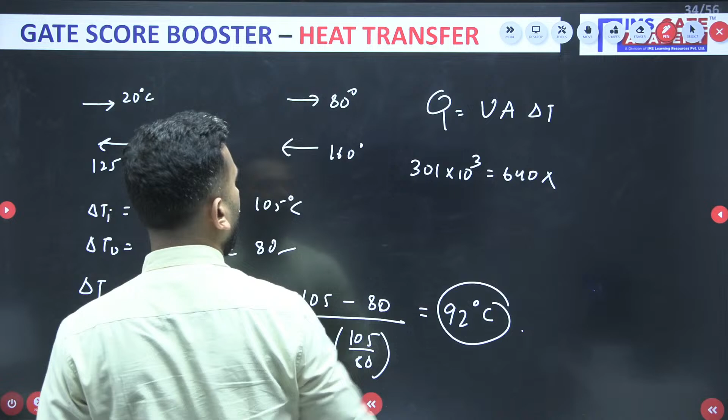So this is 640. Now area we need to find out. And what is delta? 92. Don't think Kelvin we have to put, no, it is a temperature difference, logarithmic mean temperature difference. So whether you write degree centigrade or Kelvin, that is the same thing. What area are we getting? Area we are getting close to 5.11 meter square.

Okay, pi d l. He is asking the length, no issues, pi d l, do it. 5.11. Do we know the diameter? 1.5 centimeter, very good. So pi into 1.5 into 10 to the power minus 2 into length is equal to 5.11.

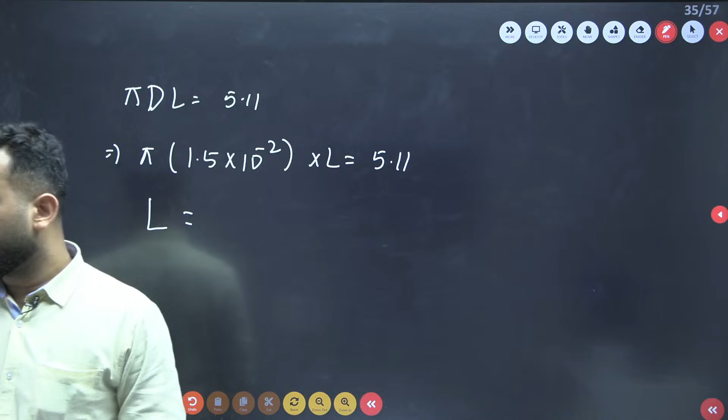Anyone with the length? How much length are we getting? I have not done the calculation here. Length? No one? So I am leaving this up to you. Whatever length you get, whatever length you get, I'm leaving this up to you, give me the answer.

My question to you is, this is done, the question is done. Could we have solved this by effectiveness NTU method? This we solved by LMTD method. But could we have solved it by effectiveness NTU method?

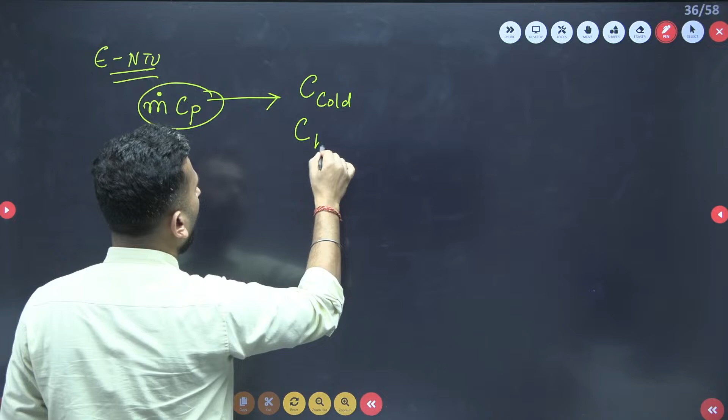See, I know the mass flow rate and Cp of both the fluids. So I could have calculated C, that is the capacity rate, heat capacity rate for the cold fluid and C for the hot fluid, yes or no. From there I could have calculated the capacity ratio, that is C minimum by C maximum, yes or no. I could have calculated the capacity ratio, C, very good.

Maximum heat transfer rate I could have very easily found by C minimum into TH max minus TC minimum. So Q max I would have known, Q actual I already know, I have found out. So could I have found the effectiveness? That is Q actual divided by Q max. So effectiveness मिल गया. I know the C.

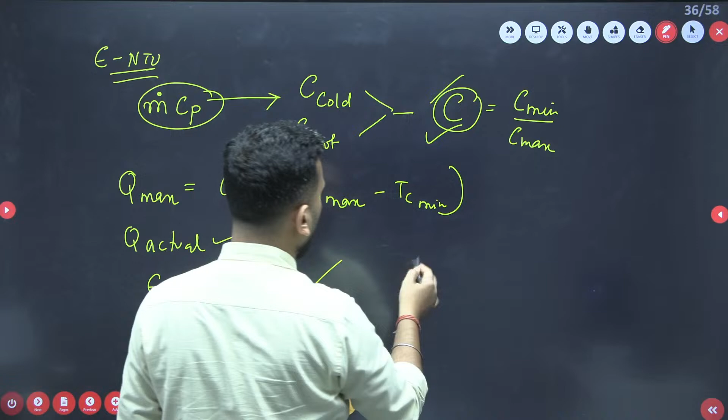So do we have relations of NTU? Do we have the relationship of effectiveness as a function of NTU and C? Do we have the relationship, effectiveness as a function of NTU comma C for a counterflow heat exchanger? That is a big expression. So from here NTU you would have found out, you know the two things, NTU मिल जाएगा. NTU is what? What is NTU?

Once you know what is NTU, then I know it is UA by C minimum. NTU is nothing but UA by C minimum. C minimum I know, U I know, area I could have found out. Once you know the area, simply apply pi dl and you will get the value of L. So whether you apply, my dear friends, whether you apply the LMTD method or whether you apply the effectiveness NTU method, you would have got, from both the methods you would have got the value of L.

Now what I want is that you solve this question by effectiveness NTU method and tell me whether you are getting the same answer or different answer in this case. Yes, we should get the same answer. If you are not getting the same answer, let me know. So my dear friends, I think now all the topics I have covered, whatever questions I have come up with, some 14-15 questions, and in one question so many interrelated questions were there. All the questions I have covered with the solution. Yes, I have asked you to do something from your end also, some calculations I have asked, but I think conceptually all the questions I have discussed.